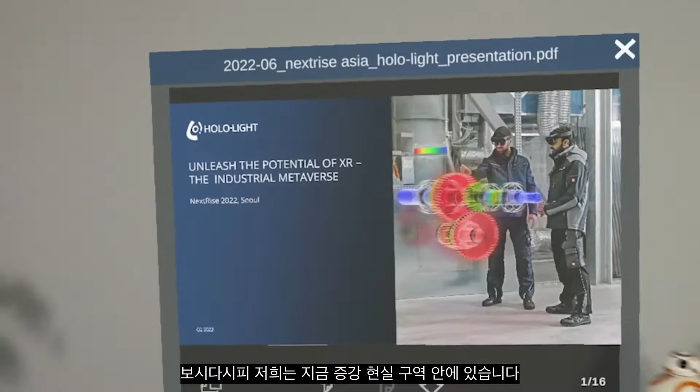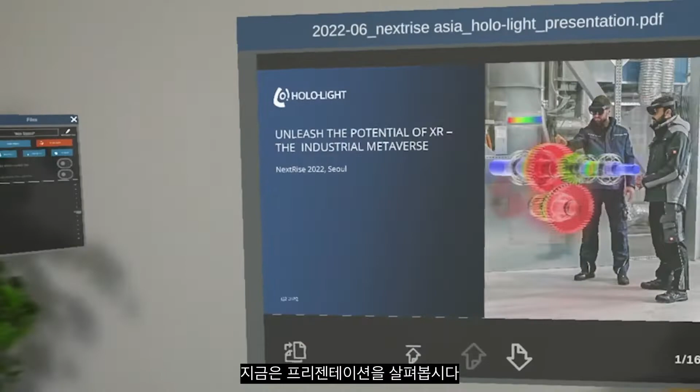As you can see, we are now in an augmented reality session. I have here my presentation, and here on the left side I have a few panels that I will need later on. So for now, let's have a look at the presentation, and I would like to introduce Holo-Light a bit more so that you better understand what we are doing.

About Holo-Light: we founded the company in 2015, and we are headquartered in Munich, Germany and in Innsbruck, Austria. We just opened an office in the United States. We are now more than 65 people, and we really focus on augmented and virtual reality. So we are true experts in this area.

I would like to introduce XTRIPLE to you. XTRIPLE is a company from South Korea, and they are really great in augmented and virtual reality. They are real experts, and they work with a lot of passion in what they do, and we love to collaborate with them. If you have any questions and you would like to talk to a South Korean partner, then I can just highly recommend getting in touch with XTRIPLE.

I would like to talk a little bit about the evolution of computing. All of you remember the times when we worked with computers, and in the last years we jumped directly into more mobile applications, working with our smartphones and tablets. But today, we really jump right into the experiences. So augmented and virtual reality is definitely the next step, the next evolutionary step in the way we work with digital content.

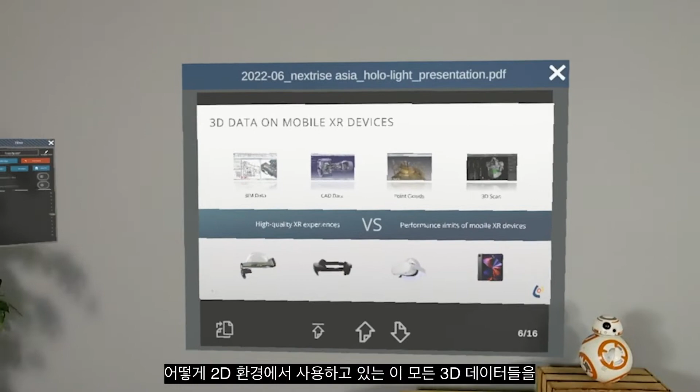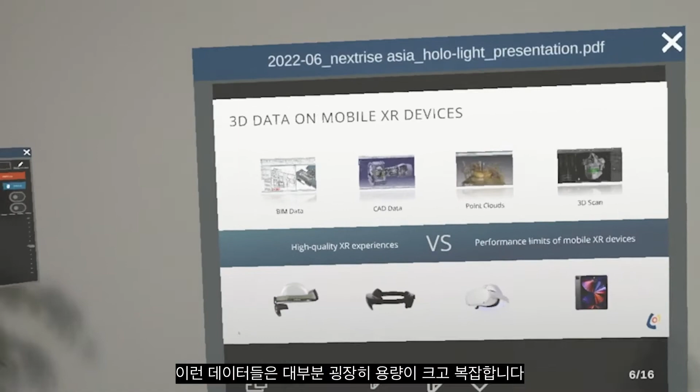One of the main challenges and key questions we asked ourselves was, how do we get all those 3D data that we currently use in a 2D environment right into our mobile XR world? The data I'm talking about is usually very large in size and complex. Think about BIM data, so building information modeling data, CAD data, 3D CAD models, but also point cloud data, so scans of our environment, healthcare data like 3D scans of our body, but also realistic game assets that we would like to use in AR/VR.

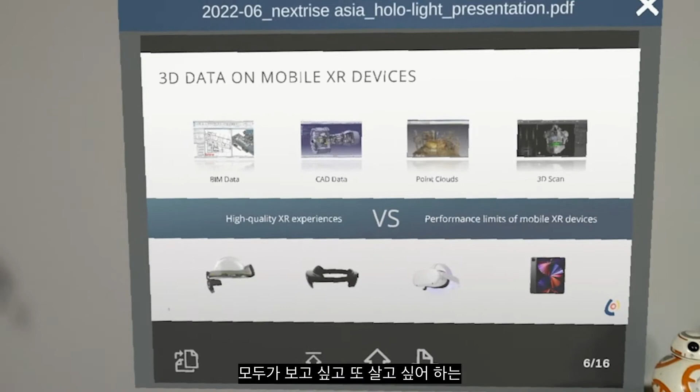The main question is, how do we get this data onto mobile XR devices if they are so limited in terms of performance? So the gap we really want to close is between the high quality XR experience that we all want to see and live, versus the performance limitations of mobile XR devices. This is what we are tackling here at Holo-Light.

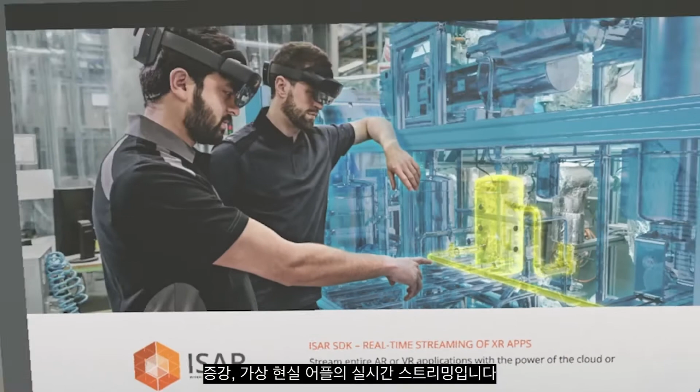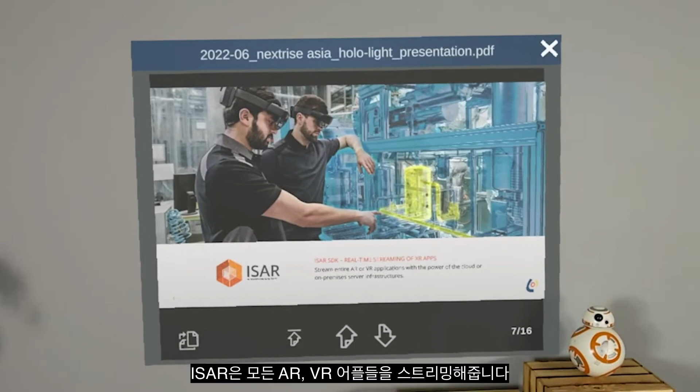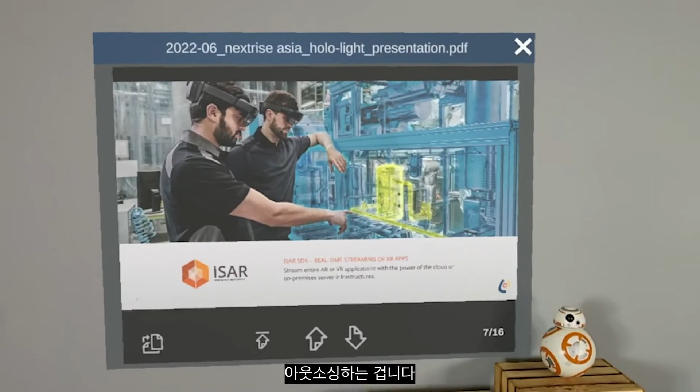The solution that we are providing is a real-time streaming solution for augmented and virtual reality apps. The streaming SDK that we're providing is called ISAR. ISAR streams entire AR or VR applications with the power of the cloud or on-premise servers to mobile XR devices. So we are outsourcing the rendering process from local devices to way more powerful cloud servers or local servers, and this allows us to create much better AR and VR experiences.

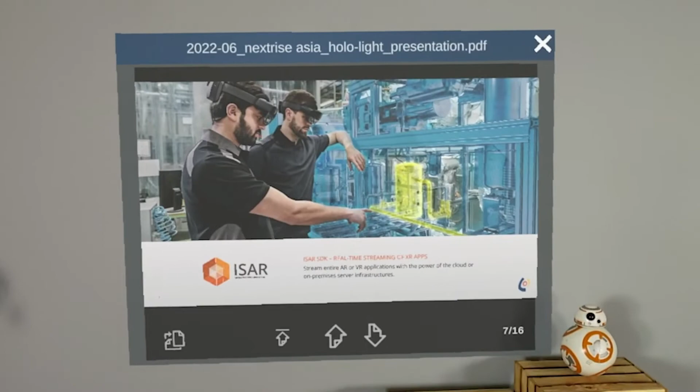Now let's go and see a video to better understand the difference.

So what are we doing with all this? Streaming provides huge potential to improve augmented and virtual reality applications, but our vision is to go even further. This is why I would like to introduce XR Now to you. This is the industrial metaverse, our vision.

So what we want to create is the most powerful immersive streaming platform, the industrial metaverse. In order to get a better feeling for it, I have prepared another video for you. So enjoy it.

Let's now have a closer look to better understand how XR Now works and how you can get your AR/VR applications right into XR Now. Everything you need is actually an AR/VR application. It can be a training application, an engineering application, a remote support application, whatever you have. You basically just have to add the ISAR SDK to create an application that can be used on XR Now.

XR Now is then the place that unites all AR/VR applications, where all kinds of users can access with their different AR/VR devices to that one platform. That's the way how they can step right into the industrial metaverse.

There are a variety of benefits that enterprises on the one hand, but also app users on the other hand, have by using XR Now. First of all, enterprises benefit from a unified platform for mass rollouts, so you're not limited to just a certain amount of users.

Then you benefit from unlimited performance for XR devices, as XR Now can be set up in a cloud infrastructure. You have a global availability of all XR use cases, so no island solutions, everything is consolidated in one place.

App users benefit from a high quality app experience, because you can visualize your 3D content in high quality. You have a seamless 3D data pipeline, which means that you can connect your different tools and data to all kinds of AR/VR applications that are hosted on XR Now.

And the connection to XR Now is very, very simple. So the simplicity for the user is a key component to make AR/VR a success.

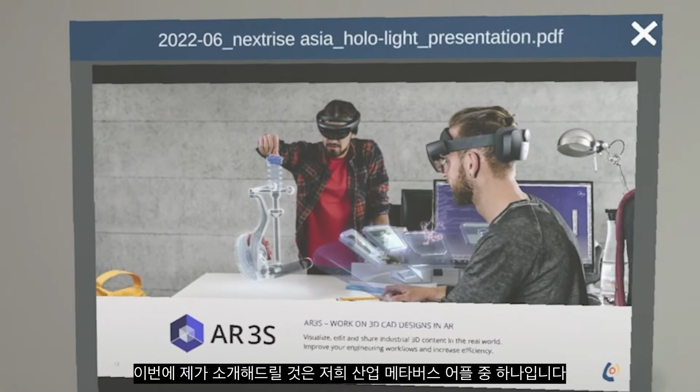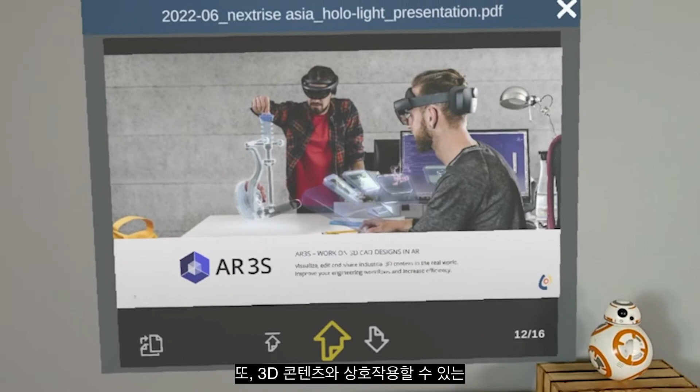Next I would like to introduce one of our industrial metaverse applications, which is called AR3S. AR3S is the augmented reality engineering space, a software which allows engineers and others to visualize and work with their own 3D CAD designs in AR. There they have a variety of features to interact with the 3D content.

To demonstrate how AR3S works, I just have to turn left and have a closer look at the menus, because we are already into AR3S. Let's start by loading a file that I would like to show you. The file browser opens and we have a list of individual 3D CAD models. I'm searching for the one I would like to show you, which is called car frame.

As you can see, a loading cube is popping up. This loading cube is a really cool feature as it gives you a preview of the 3D model that will be shown right after you confirm it. In this case, it's a car frame with a few parts of a car. On that loading cube, you also have different features to scale the object and to mirror it.

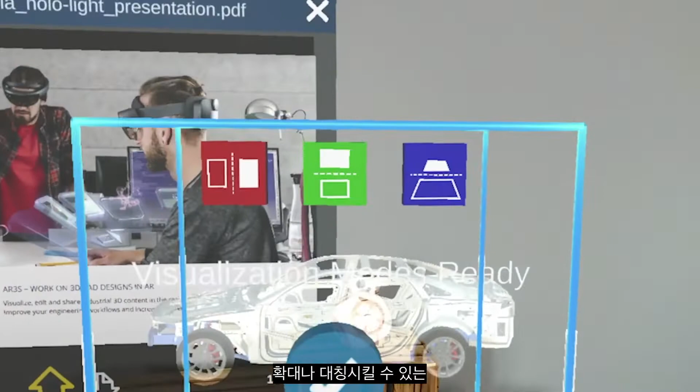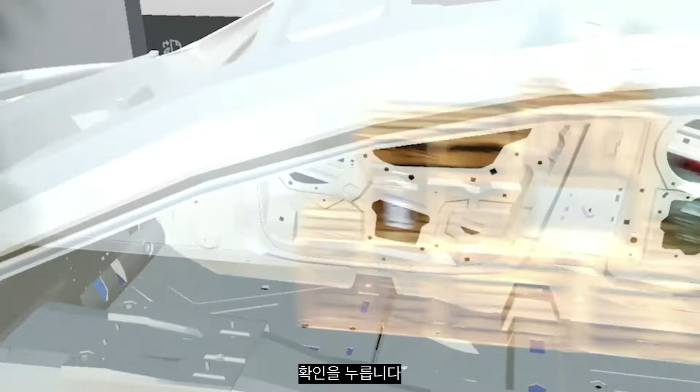As you can see, for me, it's already in a good position. Let's have a look on how large it will get. Yeah, 1 to 10 is pretty small. I would actually like to see it in real size. So good, let's go on 1 to 1. Position it in the room, and confirm it. As you can see, I have a real size car right in front of me.

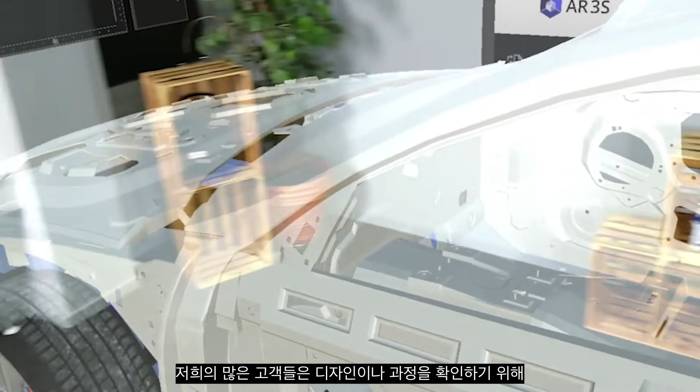So what can I now do with the car? Many of our customers are using AR3S to do design reviews and to check on assembly processes and to collaborate with each other. One of the biggest problems in the past was that they were unable to visualize the huge amounts of data they have usually in these 3D CAD models.

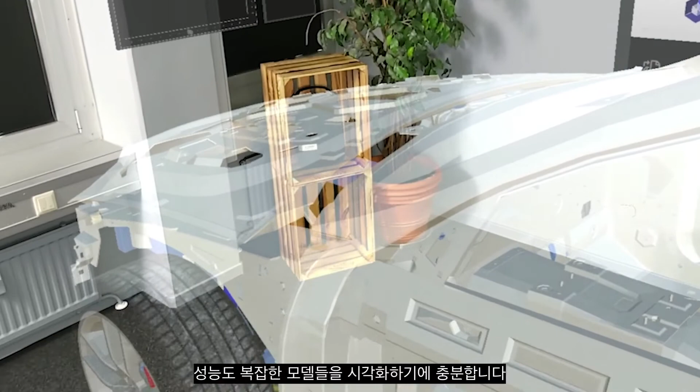As ARES is now fully streamed from the cloud, we have enough performance to visualize complex models like the one you are seeing right in front of you.

So let's now check for some features that we have in ARES. First of all, I would like to show you the exploded view. I go to the Tools panel and open the explosion steps that I will need later on. But before I can do that, I need to highlight everything I would like to explode, so I select the entire hierarchy. As you can see, the model became yellow, so it's highlighted. Let's now go a bit back.

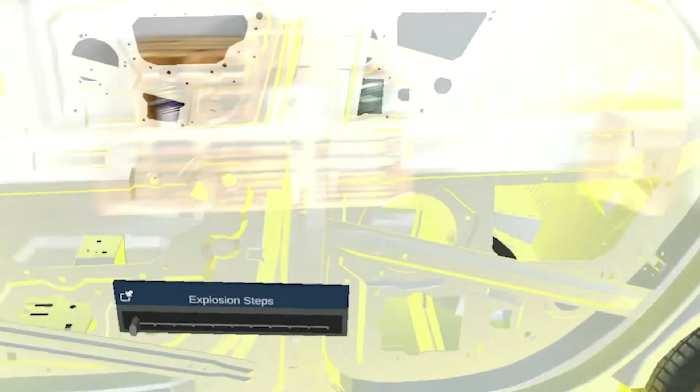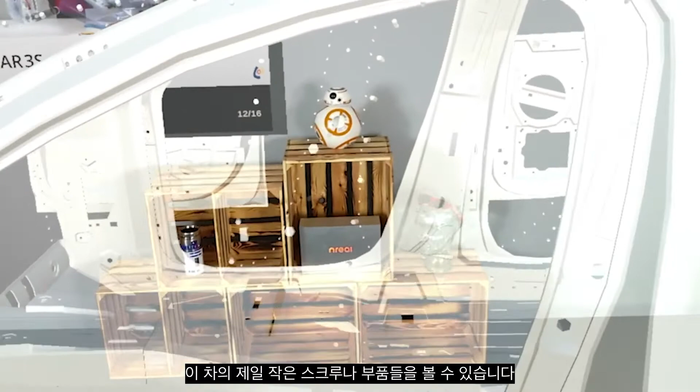And now I will use the handle. And as you can see, everything explodes. You can see that even some smaller screws and parts are part of this car, so the number of polygons is quite high. So let's go back.

And that was the explosion feature. What else do we have in ARES? Let's have a closer look at the hierarchy. This hierarchy tree gives a list of all individual parts that we have in ARES. I can also highlight and hide parts. So let's now hide the body and the frame and have a look again. What do we see now? We see the front axis and the back axis.

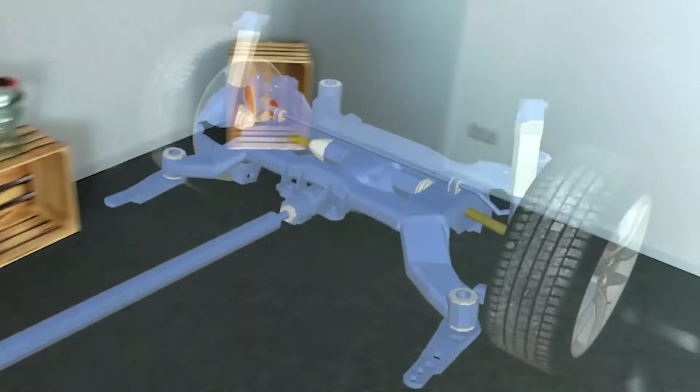So the different features of ARES allow us to create really nice use cases, and one of them I would like to show you now. Let's assume I'm an engineer and I would like to work on the back axis of this car. I need a few parts that I need to check on. First of all, I would like to move the axis into the right position.

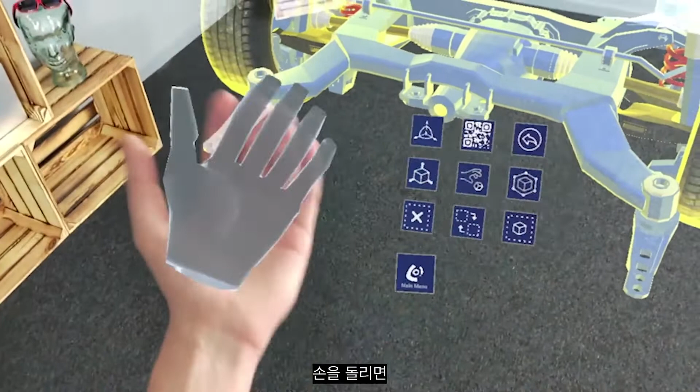So let's do that. In order to do that, I can just look at the axis and use the quick hand menu, which is connected right to my hands. If I turn my hands around, I can see a few features, and here on the right side, I have a feature called bounding box. This bounding box allows me now to move objects in space. I can also rotate them. And here we go, now I have it right in front of me.

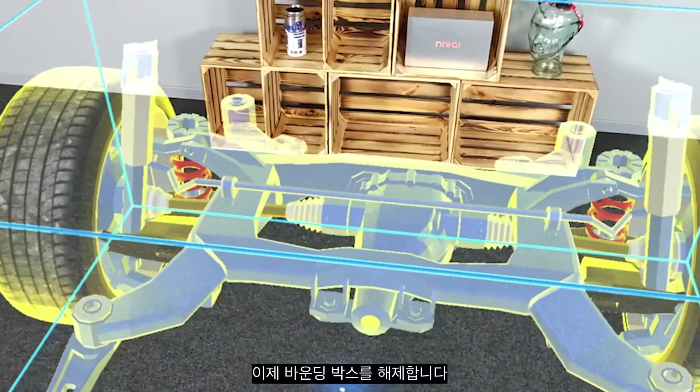Now let's deactivate the bounding box. Next I would like to have a closer look at the brake disc that is right here behind this wheel, and I need to check whether I have enough space for my hands to go through this space. One of the features I could use now is the measurement feature.

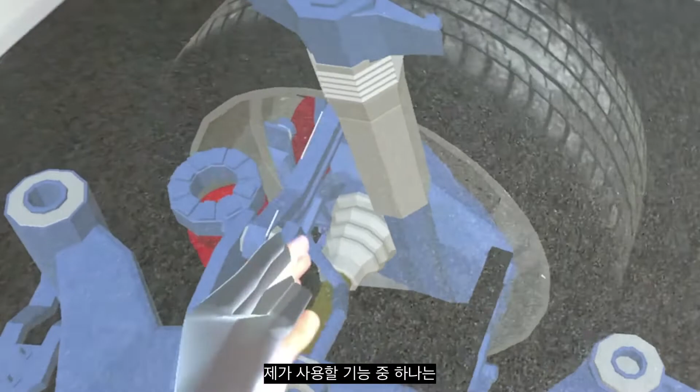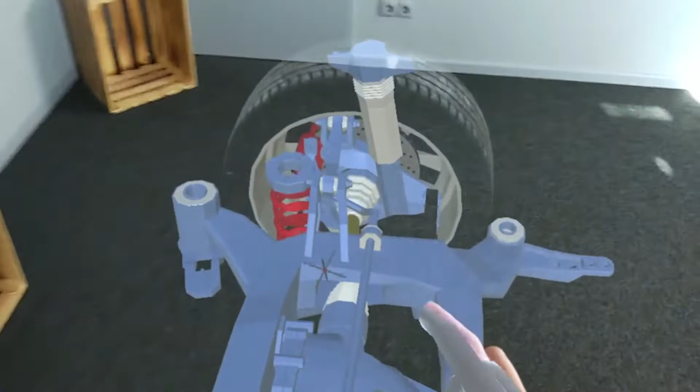So let's go to the Tools menu and activate Distance and Angle. As you can see, I have now this little cross connected to my finger. If I put that right into position and confirm with the AirTap gesture, I can measure distances as well as angles. This is a really cool tool to document and report on distances and angles. We can even change things afterwards if they are not in the right position.

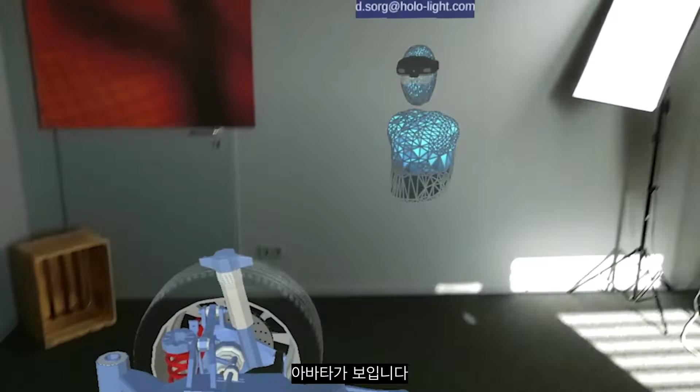So as a next step, I will invite my colleague to help me with that situation, and therefore I started a meeting. If I now turn around, I should already see an avatar. Hello, can you see me? Perfect. So what we can do now is communicate with each other and do this use case together.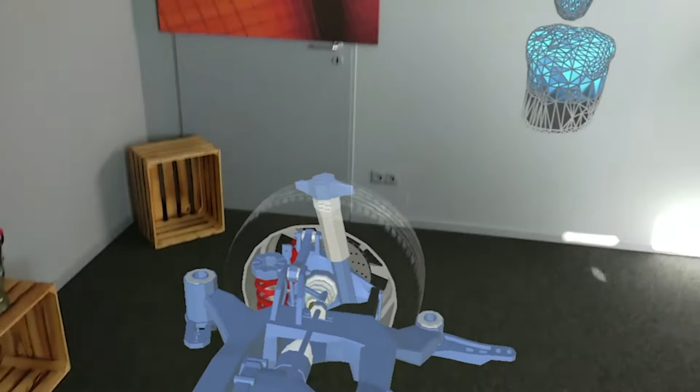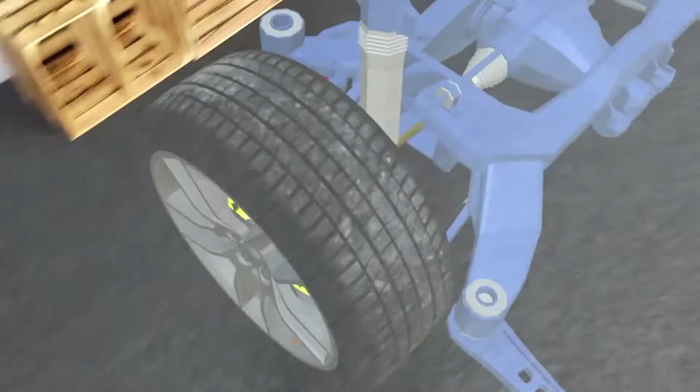One of the first things I would like to do is take that brake disc out and hand it over to my colleague. So let me check for the brake disc. Where is it? Is it free now? No, I would like to take the other one, brake disc number 2. Now I will use the grab function, and if I do that, I can just go there and pick it out. As you can see, with the grab functionality, I can very naturally interact with the 3D model.

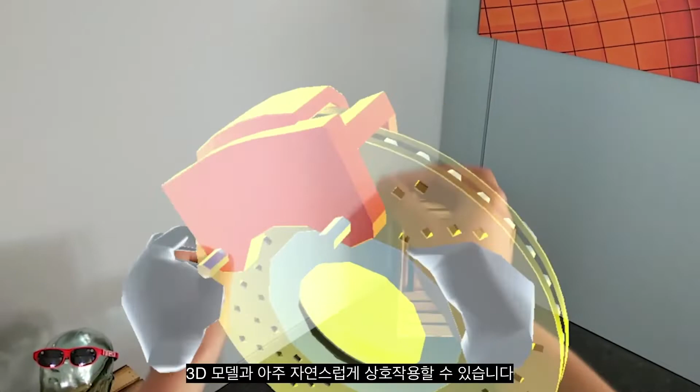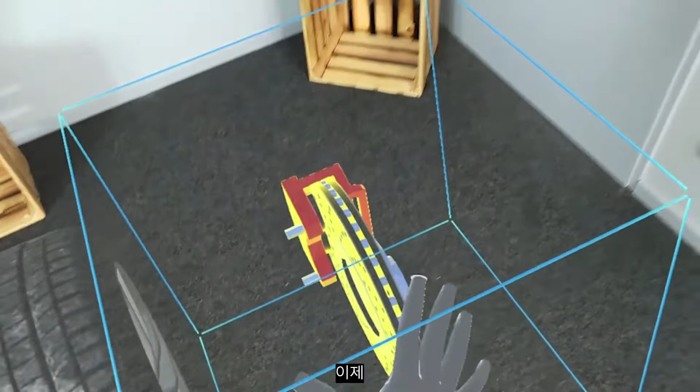And now I will hand it over to my colleague, who can take it and give it back to me. Perfect. So this is a great way of collaborating together and having a closer look at the feature. Now let's go a step back and put the brake disc right into the place it was before.

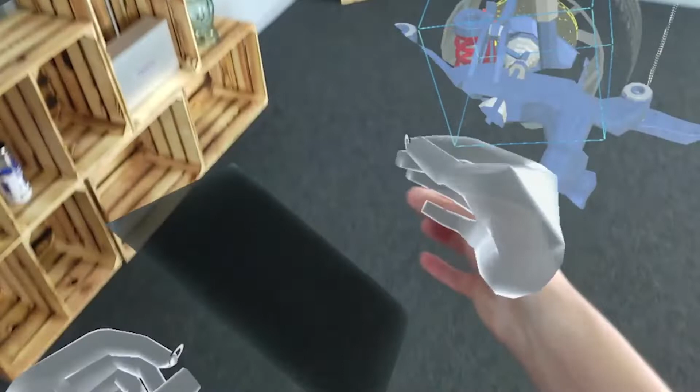Okay, perfect. Now I would like to show you another feature, so we will go back to the Tools panel and click on the button Cross Section. Here we have these three objects coming out, one of them the so-called plane, and that plane allows me to slice through an object. So what I can do now is, by putting the plane through the object, cut away the parts we don't need at the moment, and I will use that to have a better view of the brake disc.

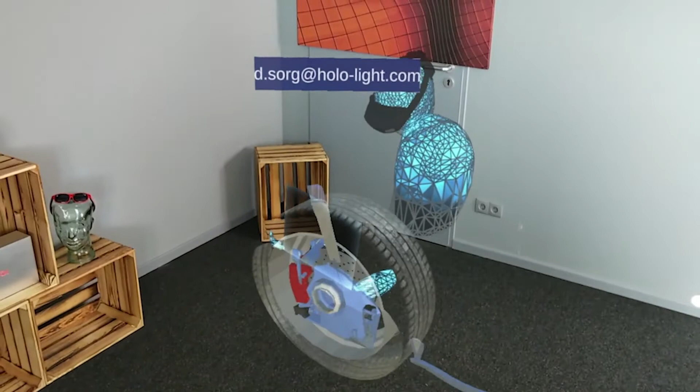So it's not just me who can interact with the plane. It's also my colleague who can take it over. Perfect. So this is really how it is to work in an industrial metaverse.

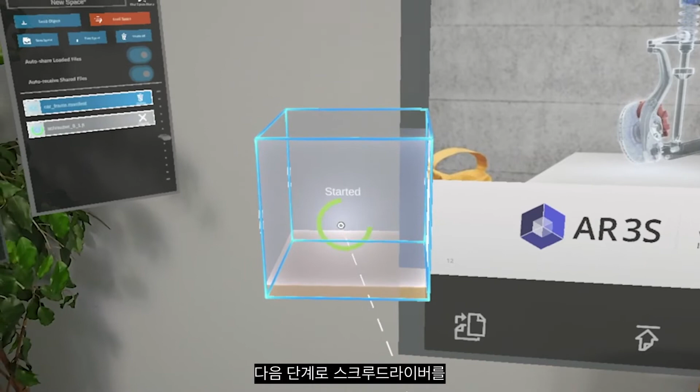Let's now do something as a next step and load a second file. Therefore, I go to the Files browser, and I would like to load a screwdriver, because as a next step I would like to see whether I'm able to use the screwdriver to go right to the place where I needed to mount all the screws. So here, let's check. Okay. And with the second file we loaded, the screwdriver, we will now check whether we will be able to mount different screws right on this axis.

In order to do so, I will highlight the tool. I will select it with the grab functionality. And I can naturally move it. But I'm not able to do that, so that's why I'm handing this over to my colleague.

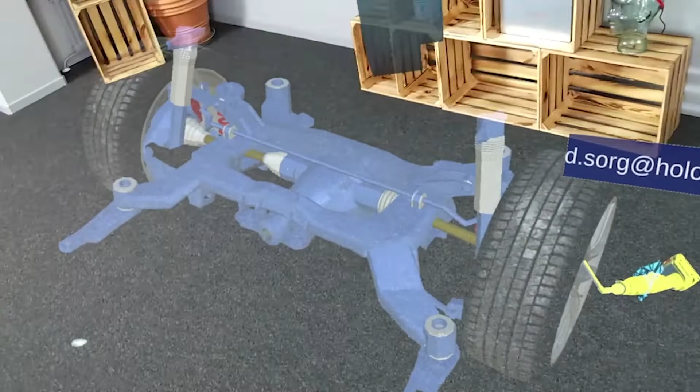So perfect. As you can see, you can build up several tasks during an automotive engineering process, which is very, very nice. And as a last step, we will now have a closer look on whether our hand collides with the different parts, and whether we are able to put our hands right through the parts around the wheel. Therefore, we have the so-called collision detection feature.

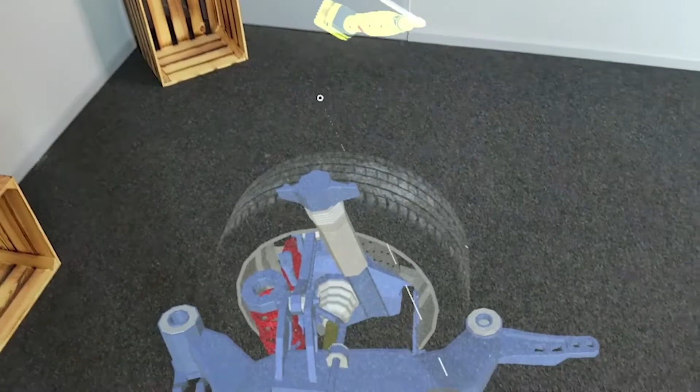It's a hand intersection. So whenever I now touch another hologram with my hand, it should get red. Let me check whether I will be able now to put my hands right through this place. You can see that I'm colliding here on the left side. So I really need to be careful of how I can put my hands through this part to check on an assembly process. Very nice features.

And we have several more features that allow us to interact with 3D objects in AR and VR. But for now, I think I'm ready, so I will say goodbye to my colleague and jump back to some slides to show you a few real-world examples of how enterprise customers are working with this technology.

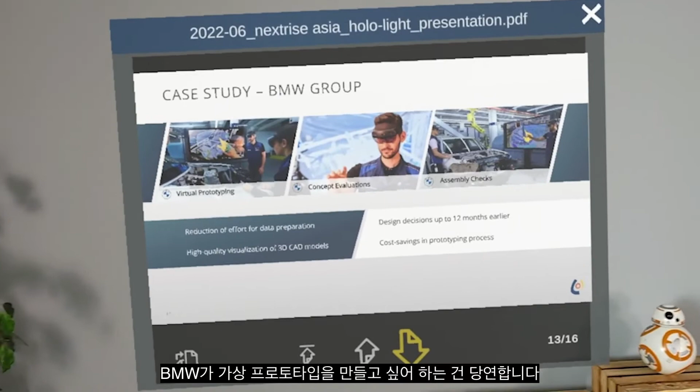The first example I want to talk about is the case study we did together with BMW Group. BMW is producing and manufacturing cars, and this product lifecycle is usually very long. So it's just natural that they want to do virtual prototyping. The advantage of doing virtual prototyping is that they can see designs and concepts much earlier than before, and they are able to save costs because they don't need to manufacture each and every part.

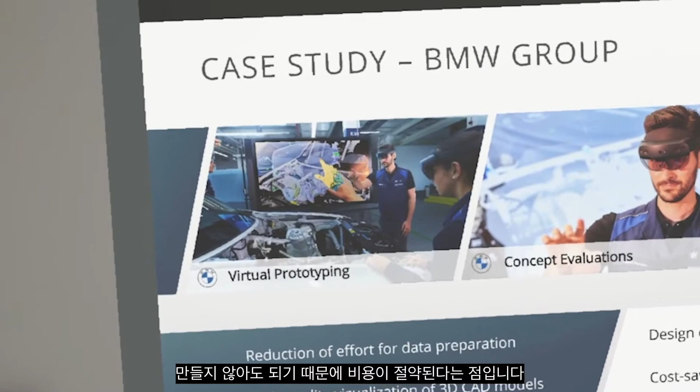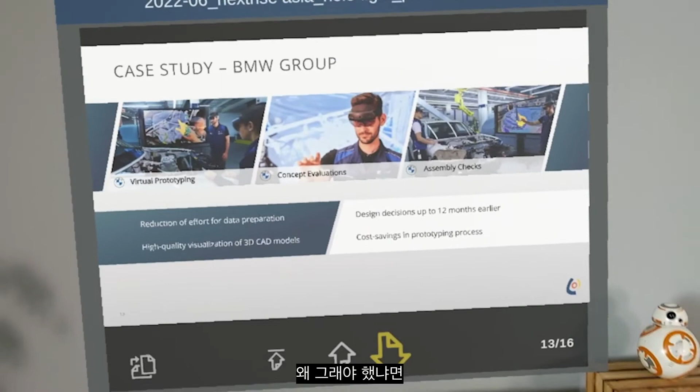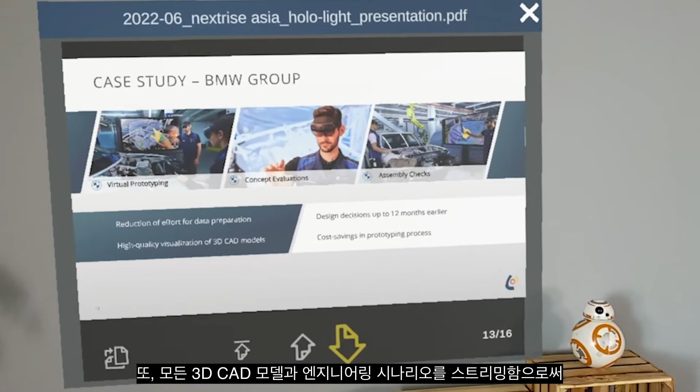This is a great example because the data that BMW is working with, the CAD data, is usually very complex and large in size. That's why in the past they always had to reduce the data, which was a lot of effort. They had to do it because otherwise the quality of the visualization would have been very bad. By streaming the entire 3D CAD models in an engineering scenario, they are able now to make design decisions up to 12 months earlier. They have a smooth workflow and cost savings for each prototype they are manufacturing.

The second example I would like to show you is from the healthcare or medical sector. Our customer Hatch is a company that provides an AI-based solution which allows surgeons to basically get a 2D image of a body part into a 3D image. With the help of augmented reality, the planning process as well as the preparation for surgery gets accelerated and much better. So what Hatch is doing is visualizing complex data, and CT scans are very large and complex in size, so they need the streaming capabilities to visualize this content and support the surgeon during his surgeries.

To summarize our product portfolio: beside the platform XR Now, which is our industrial metaverse and basically a collection of all your AR/VR applications, we provide the technological backbone, our ISAR SDK, which enables the streaming of augmented and virtual reality applications. And then last but not least, we have AR3S, our augmented reality engineering space, which is one application specifically for engineers and designers, allowing them to collaboratively work on their 3D models. It's one of our industrial metaverse applications.